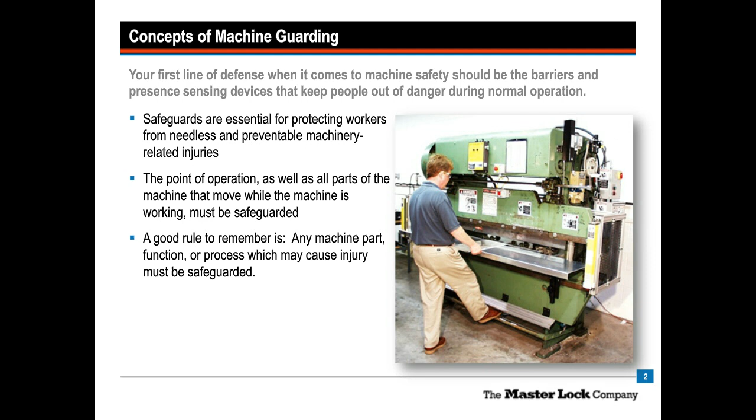And is there anything preventing that from occurring, whether that be a barrier-type guard or presence-sensing device that's going to stop the machinery immediately if that contact is made or that barrier is broken? Now, the idea behind these safeguarding principles not only applies to machine safety, but also the way we service equipment.

Good guarding enhances access and drives efficient maintenance. Bad guarding is a frustration to people. It inhibits productivity. And my finding over a lot of years is many times it's removed or defeated to make access easier to get the work done.

And therefore is no protection at all to the worker who may be counting on it as the line of defense between them and the aspects of the machine that could hurt them. So a couple of quick things, just as a review. We want to prevent contact from occurring. The person should not be able to reach through or around the guard and reach that danger point behind it. The guard should be rigidly connected to the machine so that it is not going to be inadvertently knocked off.

Or put ajar, allowing machinery to run with a gap or exposure for the worker. We want to keep things from falling into the machine. That especially goes for maintenance activities where tools or materials left behind could be projected out upon sudden startup. We don't want to create any new hazards with the guarding. This is really important when we consider alternative procedures because it's risk assessment based. So if we're simply assessing the machine as it sits and now our new guarding creates other problems, that's not a full risk assessment. We have to appreciate what could happen to the person trying to interface with this guarding. It should not create interference.

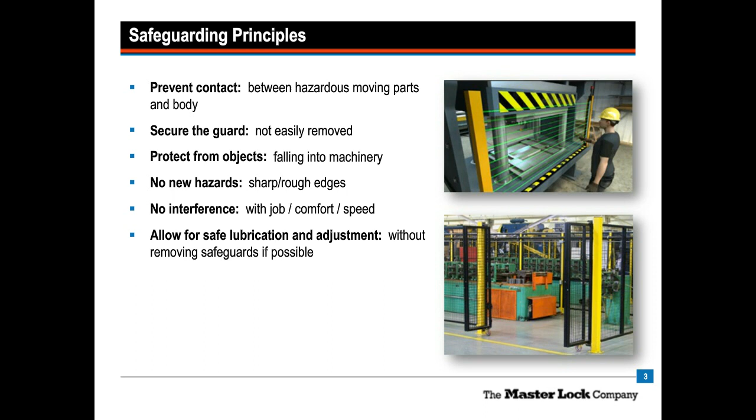And as soon as we do, we have to remember that lockout is required anytime guarding is removed and people come in contact with either the point of operation or a danger zone associated with machinery movement. So crucial, because this guarding is a signal to people that if I'm moving this guard or opening it up, I better be locked out before I do it, because there is no more protection between me and what could hurt me.

Okay, so as we look at these guards, the hazards that we're trying to protect against are exactly those that could cause the source of injury if the machinery would suddenly start up because energy has not been adequately controlled. Lockout will control that energy adequately, but what we're talking about today is alternative methods where power needs to be present in order to do certain tasks.

Certainly we'll get into that in more detail, but the idea is these kinds of mechanisms of injury, being crushed or pulled into the equipment, struck or pinned against a fixed surface by a moving part, hit by something being pitched out of the machine, whether that's routine operation and the barrier is not so much to keep you from getting in, but to keep machine parts or other materials from being projected out. That can be a real hazard in sudden startup where the guards have been removed.

Okay, there's a list of things that need to be considered for guarding, and that should be part of any preliminary assessment of the machine. Now, there are some good machine guarding assessment forms out there. They do a nice job of breaking down what should be considered in doing a machine assessment. And for those listening, I would encourage you to find a format that you like. And if you have a format that you like right now, take a look at what you may find online or through other resources such as the ANSI B11 guarding best practices.

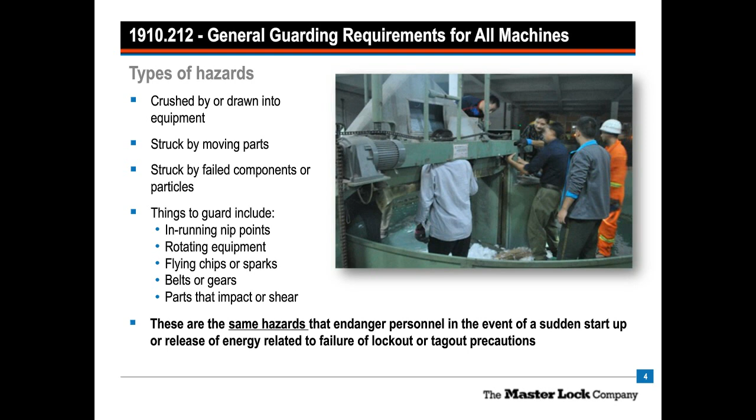That allows a mistake in human judgment to create a startup scenario, and that's where these accidents can happen. We're trying to blend the best of machine guarding and a good practical approach to controlling these exposures if indeed an alternative method is chosen to be used.

Now, OSHA focuses very strongly on recognizing that lockout, as written in the OSHA standard, is the minimum performance requirement for controlling hazardous energy. It is meant to complement and add to a machine guarding safety program in terms of being the safe work practice when the guarding is not in place to do its job or has been turned off or otherwise defeated to allow access.

We realize that lockout is time-consuming. Everybody tells us this. It's nonetheless an essential task to be able to perform, but when good and smart guarding reduce the likelihood of lockout needing to be applied as frequently, that is an efficiency aspect. And if you're designing guarding or if you're intending to invest in guarding improvements, that efficiency calculation is a really important one to make to see if there isn't payback from doing things better, from improving practice and methodology.

That's kind of where the ANSI standard comes from. The best interventions are the ones that don't get in the way and add to productivity. OSHA recognizes that there are a number of tasks that are routine, repetitive, and integral to production that are not covered by the lockout standard. However, they do require equivalent methods of protection to be put in place that offer the equivalent safety as lockout.

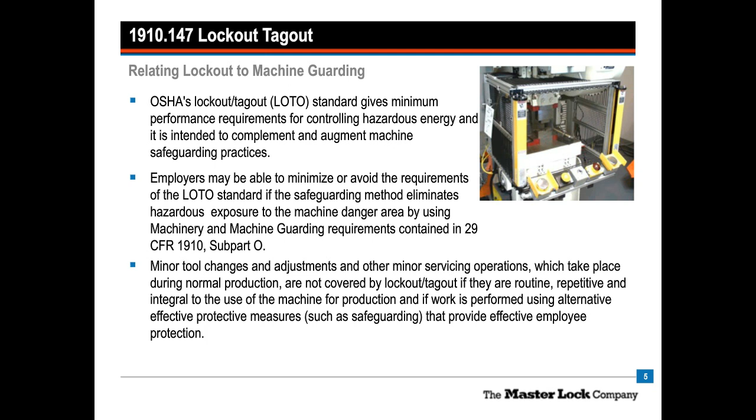Question is, does it really? Is the level of protection equivalent to lockout? So lockout needs to be applied anytime multiple people are servicing or repairing machinery, multiple people being one or more, and it's possible that unexpected startup or a release of energy that could hurt them could take place.

Anytime a worker bypasses or removes any safeguarding devices designed as a barrier or presence sensing device and exposes themselves to the point of operation, the machine should be locked out prior to that guard being defeated. So if any aspect of their job requires them to go into danger zones, putting their body in contact with the point of operation or an operational area of the machine, a danger zone associated with movement, lockout needs to be in place before they go into that level of exposure.

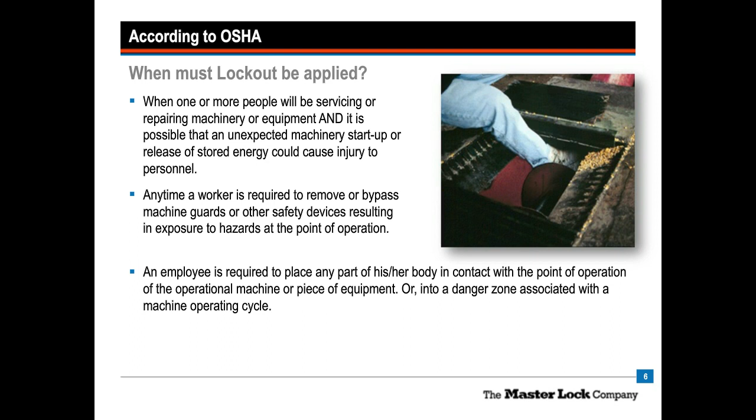Now, the ANSI committee looked long and hard at this aspect, and we thought, is there a way of improving practice based on what industry is showing us, the latest methodology and technology, and we tried to reflect that in the newly revised standard. However, we want to come back to the point: the ANSI committee believes strongly that isolation with lockout shall be the primary method of controlling hazardous energy. And so any machine where we would consider an alternative procedure should have as a foundation a lockout procedure addressing all the energy sources and how to control them.

As a personal practice, I would never consider performing assessments for alternative procedures unless I knew there was a lockout procedure that would be used for the major repairs, the disassemblies, when we don't fully understand the risks the workers are taking on. So in the absence of a risk assessment, or when the tasks we're performing have never been done before and aren't well understood, lockout should be the default precaution, even if we think that's inconvenient. It's worth the time and energy to apply lockout well, test the controls for zero energy, have something we can rely on, because we need to fully understand what we're doing if we're going to use something other than lockout to fully protect our workers.

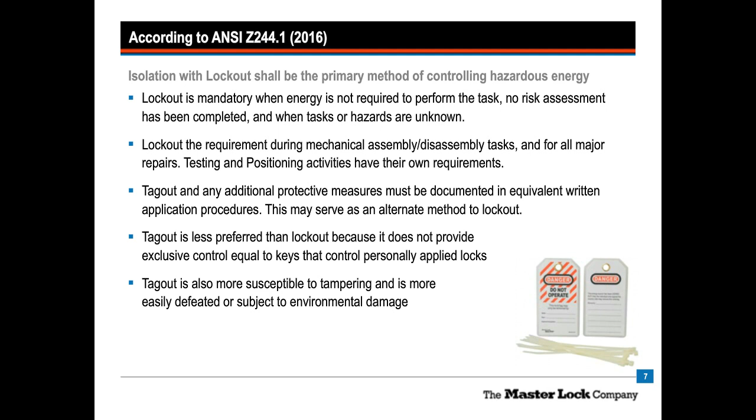So we'll explore how that can work in terms of assessing alternative procedures. Now it's clear, according to OSHA, that small and routine tasks - routine, repetitive, and integral to normal production - are what their exceptions apply to. And this needs to be documented. We need to know what that short list is, and what is expected to be done if we're not going to lock out under these. So one of the aspects of alternative procedures, and the format that ANSI has provided, is to help document your existing procedures that people are doing and you know about. You know, we have a list of three things we allow an operator to do on a machine under this exception. The ANSI methodology will help you simply record what you're already doing and verify that indeed it's a safe practice. So that's one of the uses of alternative procedures.

Now, ANSI Z244 in our recent release is broader in its scope. It is not saying that strictly production-related tasks are the limitation of what this can be applied to. So some of my comments today may go beyond that strict OSHA compliance requirement, but the idea is whenever maintenance, servicing, repair, inspection - things that are outside of production, which is keeping the machine going, doing what it's doing - that's when I'm going to use this alternative method.

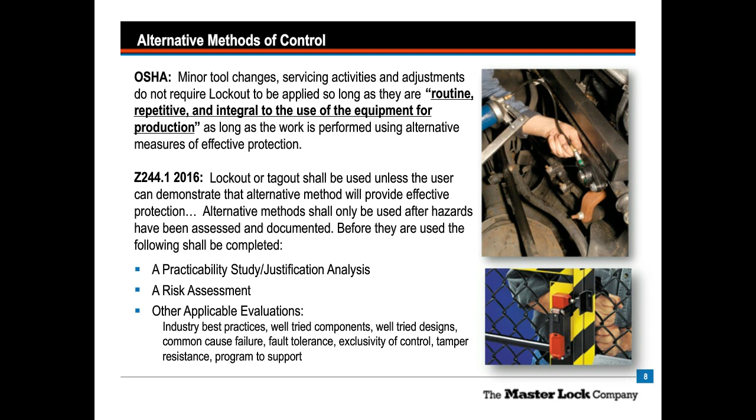Alternative methods - the question is, are they overused or underused? And I think the consensus out there is that alternative measures, and the decisions workers make, are that they are overused.

They're too liberal, and we need a better definition of what's going on. Interlocked guards or emergency stops are not considered by OSHA to be effective protection by themselves. We'll talk about control reliability, but basically at the time the OSHA law was written, based on the ANSI standard from 1982 with research from the 1970s, it reflected the truth at the time: e-stops and interlocks are nothing you want to stake your life on. They are simple measures that wear out, that can break, that can fail, and can create exposure issues to people.

However, our committee work looked at the idea that advances in guarding technology have produced a whole new breed of control reliable systems. In fact, our machinery can be so complex that reliance on these control reliable systems may be a much better engineered solution to controlling risk to the worker rather than depending on an administrative control, which lockout clearly is.

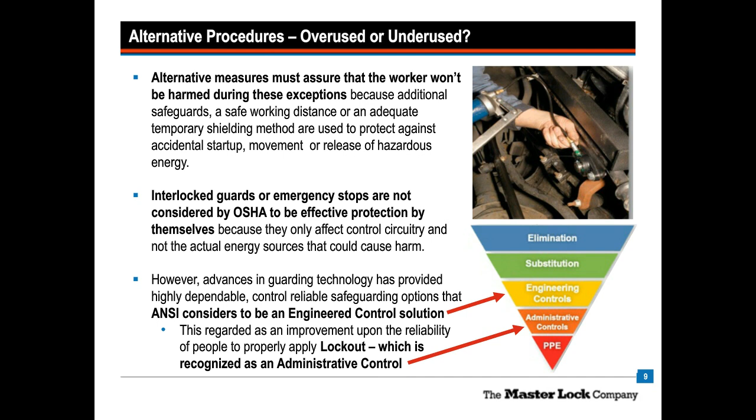There's more on this in the Z244 standard, but I want to hit a couple of high points. First, there's a lot of information on reducing risk through the design of machinery. Can we make this easily lockable? Can we get ahead of the tasks that have to be performed and design the safeguarding and ease of lockout to make it straightforward for workers to solidly protect themselves during operation or during maintenance and repair? Design trumps everything else—it engineers and eliminates the hazards. So we like going that route whenever possible for new machinery being specified or modifications to additional machinery.

Risk reduction by engineering controls also needs to be considered. What is the level of your capability with the safeguards on your machinery right now? Are you thinking about updating? If so, you're considering technical improvements to the safeguarding systems. Also consider what tasks may benefit from engineered solutions in terms of more control, reliable, and robust safeguards.

One of the things we look at, which is actually above lockout tagout in the hierarchy of controls, is warning devices—something that flags workers that a danger condition exists, to clear the area or take a safe working distance, and prohibits activation of machinery until people are in a safe position. Warning awareness can be elevated in engineering status if it can be shown that these warnings will reliably get people out of the way.

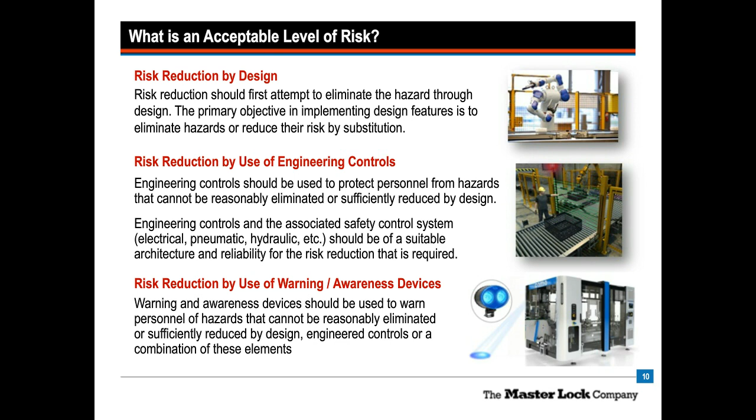Then we have administrative controls, and yes, I'm showing lockout as one of those administrative controls. A lockout full isolation procedure is a must for any multiple energy sourced piece of equipment. It should be available and people should be able to follow it. But also, you have standard operating procedures, which may minimize the likelihood of problems.

You may have maintenance work procedures spelled out for how certain tasks are done, including testing or positioning of machinery. You may have alternative procedures that say if we can't lock out under certain circumstances, we've determined the methods to be followed are A, B, C, and D. That has to happen every single time—you can't do it your own way, you can't take shortcuts.

Finally, risk reduction by personal protective equipment is on that low echelon of reliability, very dependent on whether people use it and whether it's in good shape, but it can be a final buffer added as a layer of protection to these alternative procedures.

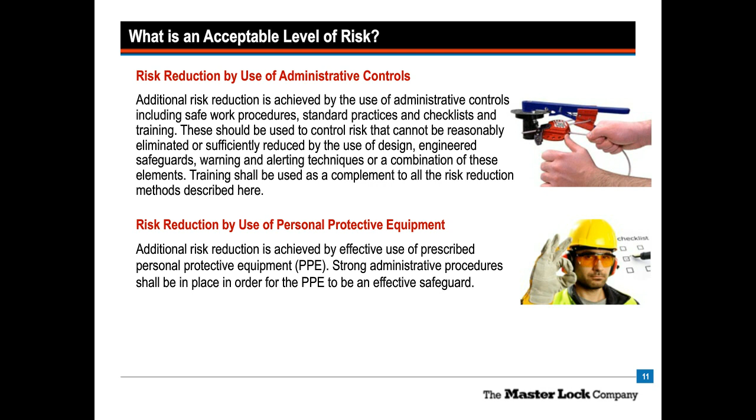So why wouldn't you want to lock out? People scratch their heads, but a lot of us know, because we hear the feedback: it's tough to lock out. 'I cannot lock out and get this job done, what do you expect me to do?' Or, 'It's so hard to lock out because I have to get a scissor lift to reach the valve in the ceiling.'

When energy must be present because it's required to do the work, we have a solid argument as to why full lockout may not be feasible. However, what can we lock out, leaving only the energy source we're well aware of and may be able to control in other ways?

There may be hazards such as, to give two, heat energy and radiation. They may be present, and short of a cool down period, which could take minutes, hours, a long time, we're consistently seeing people using PPE against that residual energy source without any alternative procedure specifying what has to be done. And that would be an energy source that has to be identified in an alternative procedure.

Sometimes energy is required to maintain equipment in a safe state. That may be energized safeguarding systems that detect faults and prevent activity from occurring; that may be one aspect. There may be safeguarding systems that hold process chemical systems in a controlled state. If that energy was lost, protection would be downgraded, and hence the risk could be greater. Warnings, alarms, sensors, things like that may need to be energized, hence there's energy still in the machine.

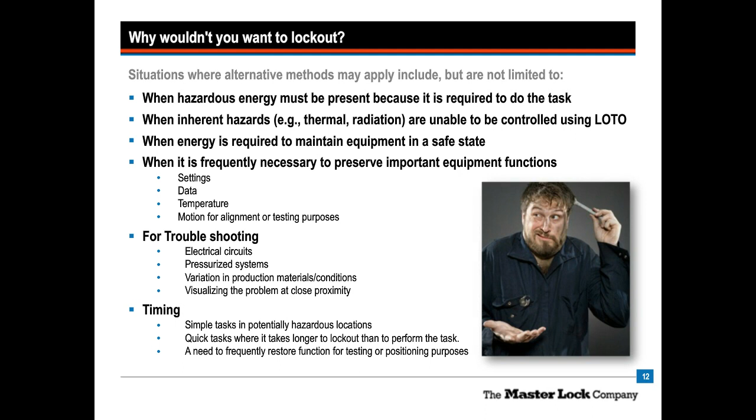So there's many reasons why people are challenged by lockout, and a lot of them have to do with getting the work done. They can't do it as they feel it needs to be done with lockout in place. We'll talk more about alternative procedures and how that can answer some of those questions. So tagout certainly is an alternative in the short term that may flag an isolation device and keep it from being activated. But in addition, look at adding something to that tagout.

Here's the common examples. Blockout means I have physically restrained something that could move under power from moving by putting something in place that will restrain it and not allow that to take place. It could be propping or chaining up a raised surface. It could be, as we're showing here in the picture, a two-step approach. I am using a blocking mechanism to support weight, and when I retrieve that blocking method, I'm pulling an interlock plug out of the machine, setting an interlock that keeps that machine from operating. So I've got two layers of protection there.

First one being the interlock as it's unplugged. Second one being the presence of this blocking device that would prevent movement from occurring. Of course, the operative condition is, did the blocking device get put in the right place, and is it fully supporting what could move on me so an accident could not occur?

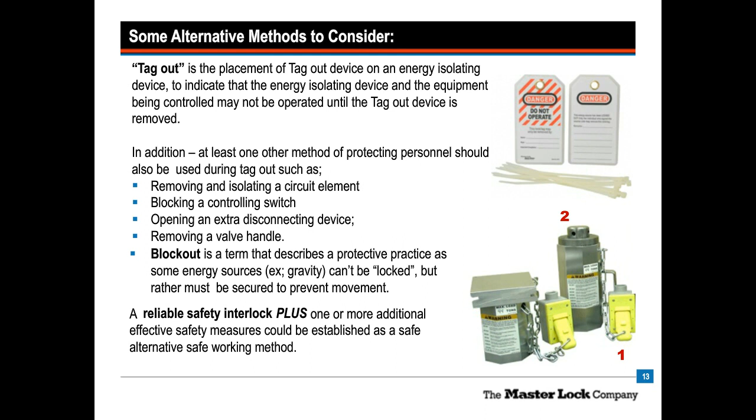Now, interlocks can be used in a layered protective structure. We'll talk about control reliability in a moment, but the idea here is I've got two layers of protection. Not only did I open an interlock on a gate that indicated to the machine, do not run while this gate is open, but I've also put a presence sensing device underneath, like a pressure sensing floor mat. There's a lot of use of laser scanner technology that can detect any disruption to the presence of people in the guarded area.

Sometimes when we look at safeguarding, we look at layers of safeguarding protection that detect people a number of ways. Okay, so we'll talk a little bit more about that.

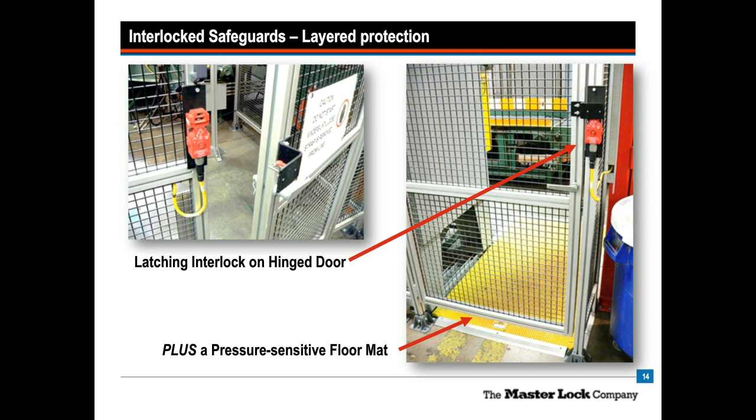When we talk about control reliability, what we found is European machinery that has had a higher degree of control reliability has been available since about the 1990s. Not a lot of it made it into the United States because it was costly. People didn't see the benefits of control reliability.

So you might have it in your workplace, but certainly if the equipment was not built in the 90s or later, unless you've retrofitted a highly control reliable system, you should count on the idea that you've got Category B, 1 or 2 in your machinery. Yeah, the interlocks are there, but they will not necessarily fail safe. They will not necessarily catch faults that occur.

So I show you a basic e-stop switch. Those are strictly on-off. A lot of times those are set as the only precaution taken to keeping the machine from starting up. Any maintenance department can tell you those switches can fail and allow the machinery to run. They can be worn out by overuse. There really is nothing more than basic on-off type functionality to a Category B, and they're widespread.

Category 1 increases durability. It can be cycled more frequently. Typically, they're well-tried components with a good safety record. However, the occurrence of a fault can lead to the loss of a safety function. It's simply that the probability of occurrence is lower than for the very basic protection we just talked about.

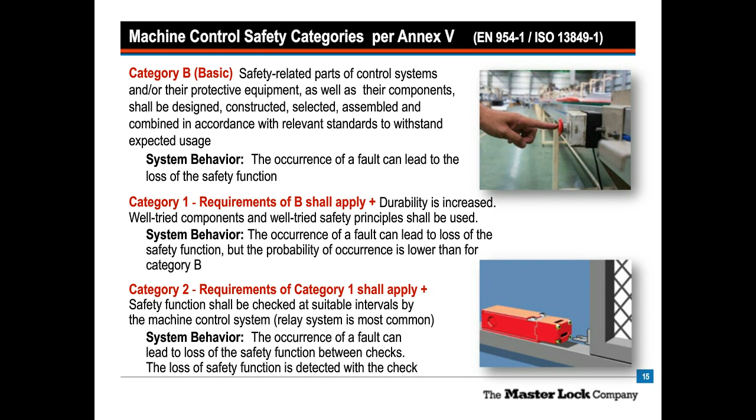Category 3 takes all the Category 2 aspects, but it's a more carefully monitored system. A performance scan is completed each time the safeguard is activated. It could stop the machine before access to the danger area occurs, as long as the guard is designed properly. A single fault in any of these aspects will not lead to a loss of the safety function. When the single fault occurs, the safety function is always performed. A PLC system is the most common way of doing this. An accumulation of undetected faults can lead to the loss of safety functions.

And so a Category 3 guard is a big step towards control reliability, but you have to look at the hazard related. If you're asking people to bodily enter an area that could create enormous harm to them, a Category 3 system may simply not reflect well on a risk assessment. If a series of faults could occur, this system does have a remote possibility of failing, allowing the machine to run. Understanding more about the capacities of this Category 3 system is very important.

Category 4 is a continuously checking, pulsing system. It is used to tracking the presence of multiple and overlapping faults. It will consistently fail into a safe condition before the next demand on the safety function occurs. So this will preemptively shut itself off. Accumulation of faults will not lead to a loss of safety function. And when the faults occur, the function is always performed. So this is a highly, highly sophisticated and reliable system.

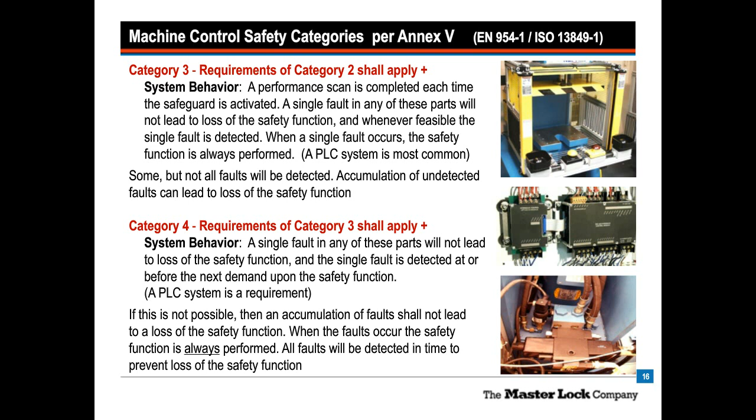Now, let's talk about the methods of alternative control. We are looking at two areas, practicability and justification analysis, which says, what will lockout do if we apply it? What can we do to minimize the exposures to the worker? And just on a surface level, what potential alternative method should we consider as we start our analysis? If we don't answer the questions well, it's hard to get beyond a practicability analysis.

And here's another use of this alternative measure evaluation. If your worker comes to you and says, hey, I cannot lock out this machine because of these certain factors in that work I have to do, you can, in a very straightforward and user-friendly manner, work with that worker to go through some basic questions.

And if it comes out that, hey, there is not a good alternative method, there's nothing reliable, there's not good justification as to why you can't lock out, it comes down to you don't want to lock out, it's the extra step, it's a hassle. But as you can see, we've gone through these questions together, and you're not safe doing it the way you've been doing it.

One of the things with alternative procedures is they're designed to say no to the activities that are simply not safe to perform with less than lockout. So by no means are our alternative procedures designed to always bless the activity and move forward. Sometimes it's to create a stop.

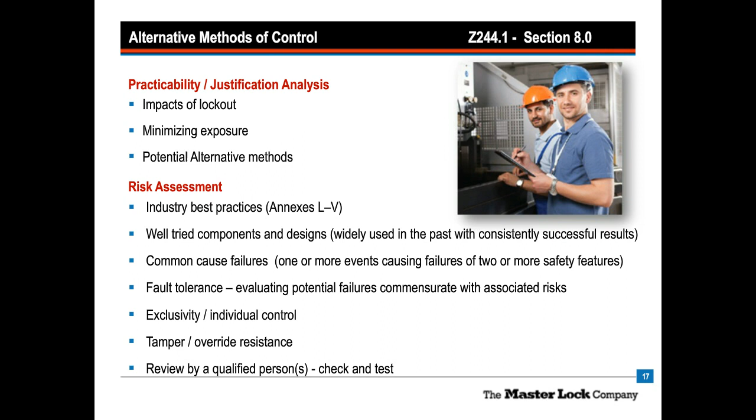So this is an example of the practicability analysis. And just to run you through the questions, are energy sources required to be present to perform this task? And if the worker says, well, no, not really, it's pretty hard to go forward and not justify locking out the machine. But does the application of full isolation lockout currently limit the ability to perform the task? If so, why? Let's talk about that.

Are there feasible modifications to the equipment that would make it easier to lock out? So if I don't need a scissors lift to get to that valve because I moved it down to the floor, if I can install local disconnects, part of the design emphasis that's been given to new machinery, let's make this as easy as possible to lock out, then we want to pursue the ability to improve lockout access rather than justify bad practice or insufficient risk control in alternative procedures. Okay.

Then we're going to go forward and ask, are there ways to reduce the number of energy sources present? If I got 3 energy sources and I'm just doing electrical circuit testing, let's lock out the air and the hydraulic. Okay. Let's let a cool down period happen or stop the flywheel from spinning. Let's control everything we can so we're only dealing with electricity, which now becomes a qualified person's responsibility who should be trained on electrical safe work practices. But it could be the hydraulic system that has to be tested. It's not by any means saying more than let's limit the amount of energy present to just what we need to work with.

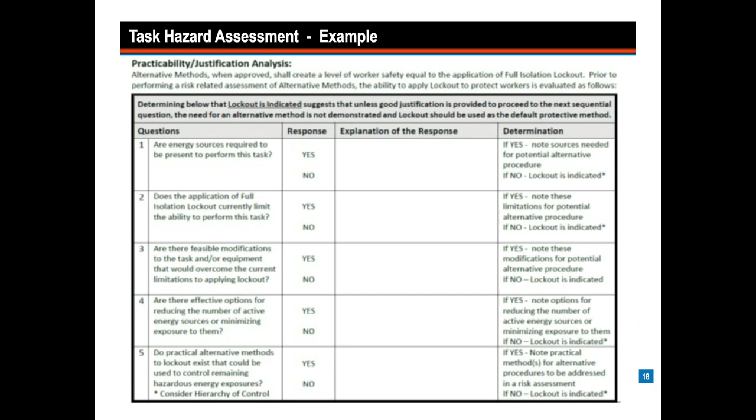Now, the task hazard assessment, when it goes forward, is a task-by-task analysis deciding what required controls should be in place. All tasks and activities should be considered. A lot of the things, including OSHA's list of things that require lockout, may very well be those problematic tasks people can't do with lockout for a particular machine.

Okay, you should consider all hazard-related sources of energy, which means that foundational lockout procedure hopefully discusses not only electrical and air pressure, but stored air pressure and spin down time and temperature release and proper positioning of the machine, so it's in a resting position and gravity is alleviated. All these things go into the hazard assessment. We're just not laser focused on one energy source and blind to what truly could hurt us.

Okay? Consider the nature, duration, and frequency of exposures. What's really happening here? Is this truly a minor exposure that really would not result in harm? That's easy to note in an alternative procedure that may be for a routine, repetitive, and integral task. Or if it is a highly complex one, it may demand engineering solutions as its best and only outcome. Be honest and conservative. If somebody could still get hurt despite what you want to do for alternative measures, it's clear the task requires lockout to be applied.

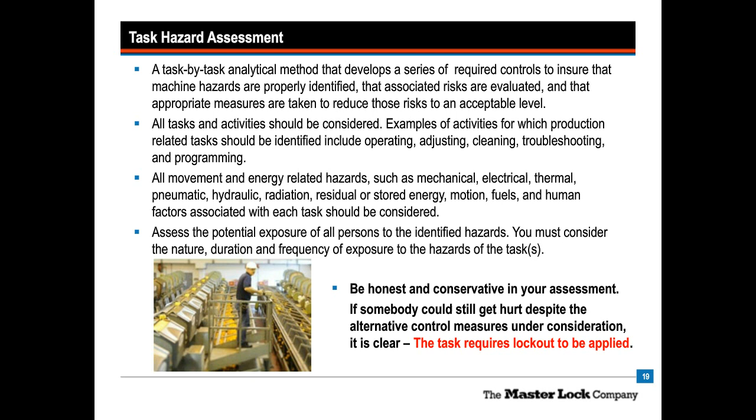The idea is we don't want to bless complex tasks with lots and lots of exposure. We want to do the day-to-day stuff that really gives people fits when full lockout gets in the way of getting the job done. I'm not going to march through this whole list, but these are some of the hallmarks we look for when somebody says, hey, I've got a challenge with a task, can you help me assess this alternative procedure I have in mind? These are some of the characteristics of tasks that respond well to that kind of alternative method evaluation.

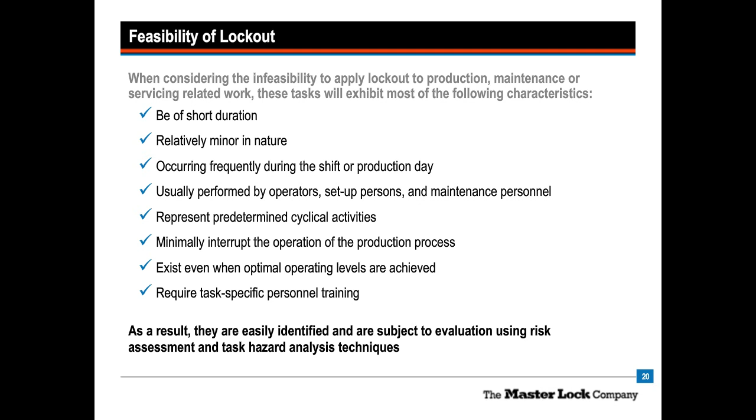Alternative methods are often developed into procedural instructions that go out with the machinery. For any alternative procedure, we should look at who's actually going to use this thing. It's not a blanket procedure for anybody to use. There should be a training roster associated with each alternative procedure, saying only those who have been through training and understand exactly what we mean, because a lot of this is administrative control. We are expecting people to do as the procedure instructs, using tools and methods that are subject to human interpretation and behavior. But if I've trained a person how to use this, that's certainly a step in the right direction of assuring they know what we're expecting and can perform as specified.

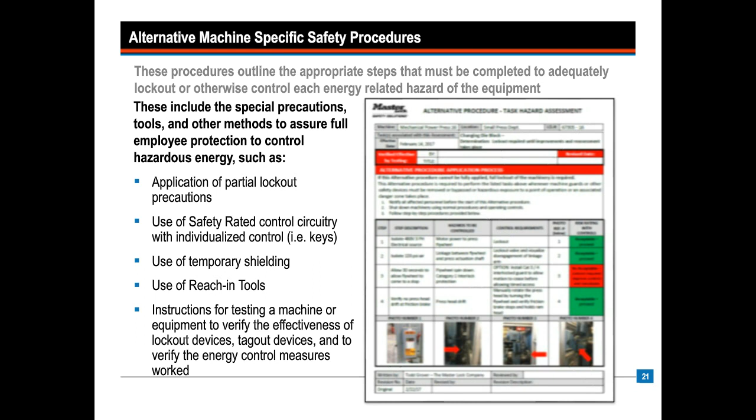This is an example of a task hazard assessment. We're looking at something simplified in terms of risk assessment. The idea would be, before any controls are placed, what could go wrong? What would be hurt? What's the expected outcome? We may find that as we do an assessment, nothing really could happen to a person. If this machine suddenly started up, it wouldn't really cause any harm. So we may find simply that as the task stands, it's acceptable.

Go ahead, we've got now a documented method to do it. But if we get into conditional or unacceptable conditions, we need to do that risk assessment and move it up. The assessment boxes on the right-hand side show post-control evaluations, again saying what could happen, what is the likelihood it's going to happen. We're drawing the line here in this simple assessment model at a first aid case. If what's going to happen is likely to provide more than we can treat with our in-house resources, then we've not achieved an acceptable level of risk, and we should hold back.

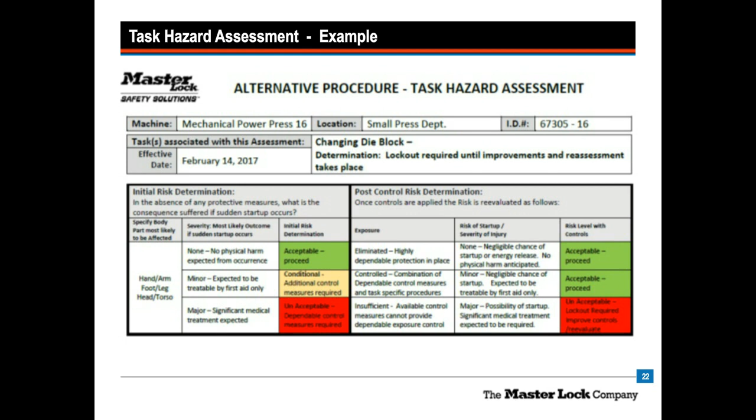Here's an example of a task hazard assessment underway. It's summarizing the task to be done, which is changing the die block. We're listing risks and recognized hazards. We're recognizing here in this preliminary discussion what we think would go wrong, and that it's an unacceptable condition as it sits without any controls in place.

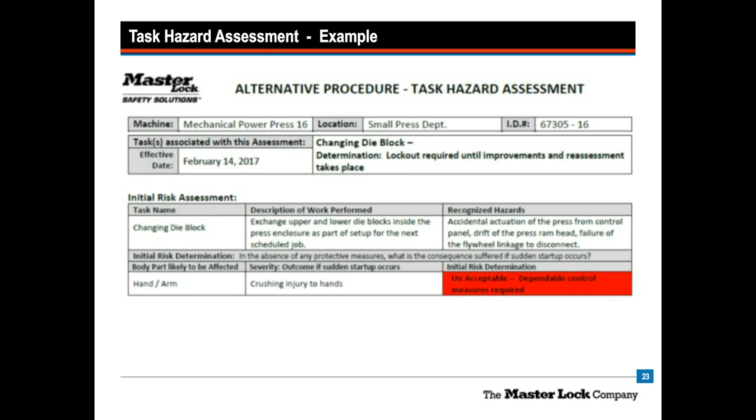Here is the assessment now done post-control. We're specifying what has to be done. Again, everything is changing the die block, but we find we've achieved acceptable conditions on the top two with the controls we've put in place. However, we find we have not gotten to an acceptable position on the last hazard assessment aspect, saying there is not adequate guarding in place at this time. This means the hazard assessment has failed, so we're not ready to proceed, but we are ready to pursue guarding improvements based on this risk assessment that could drop the risk down to an acceptable level. Once installed and tested, we may find a very suitable solution to this process.

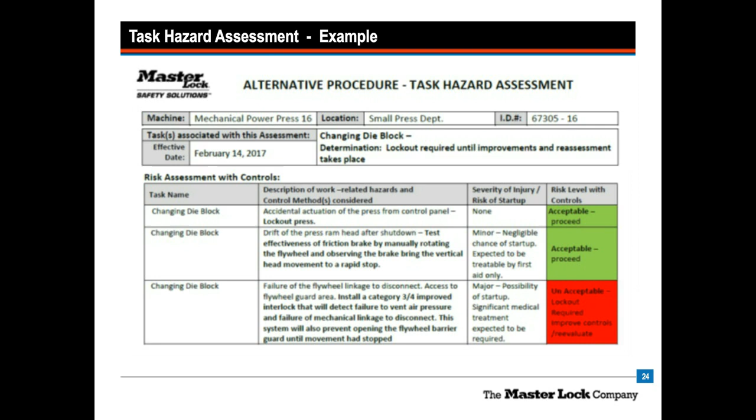So again, I'm just watching the time and knowing when we want to do some questions. This happens to be an example of a risk assessment showing certain points, given certain instructions. This is kind of a blow-up of that smaller procedure that I had shown previously, more of a discussion-oriented one.

I want to give you some time for questions. I'm sure there will be some.

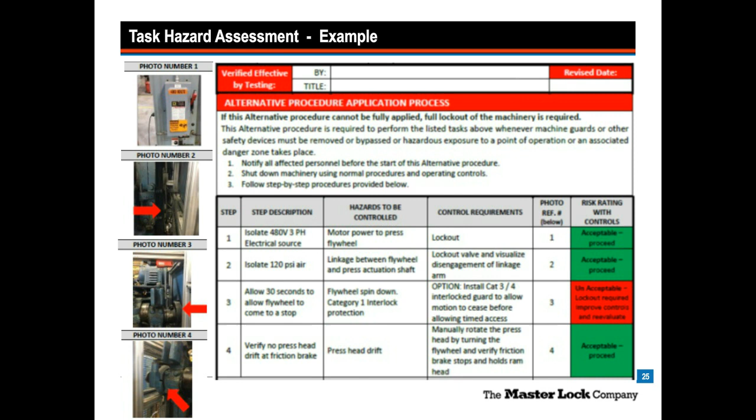This is a great guideline for training purposes, for people walking up to the machine. What task am I about to perform? What do I have to do? Is it an acceptable level of safety, or is lockout going to be the requirement for protecting myself while I repair or service this machine?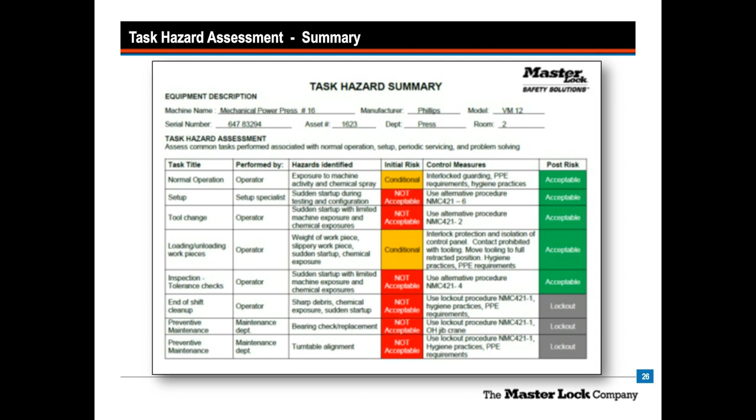Now, we moved through things really well. I wanted to leave about 10 minutes for questions. I'm sure there will be a few. Alan, if you could share with me what's come up from the audience, I'd appreciate it.